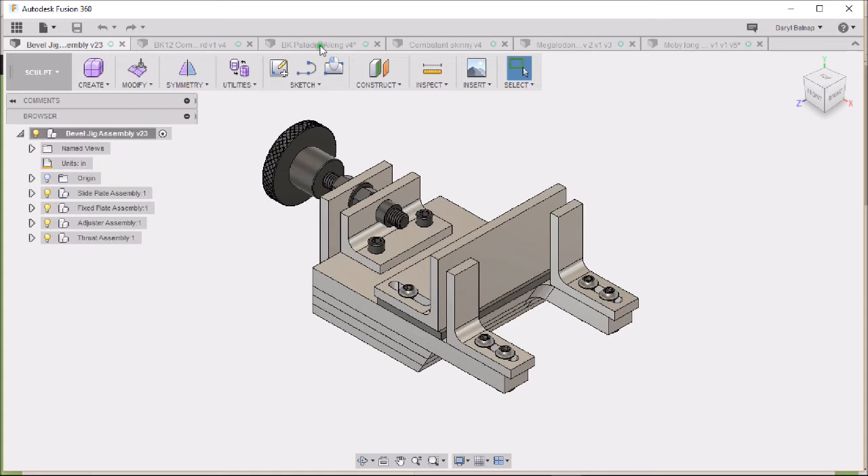These are three-dimensional profiles. You'll get a PDF template so that if you want to draw it out yourself, you can draw it out on a piece of metal. Just trace around it, or there's an actual CAD file link that you can download. And what you get when you download, you'll get a file that you can do this with.

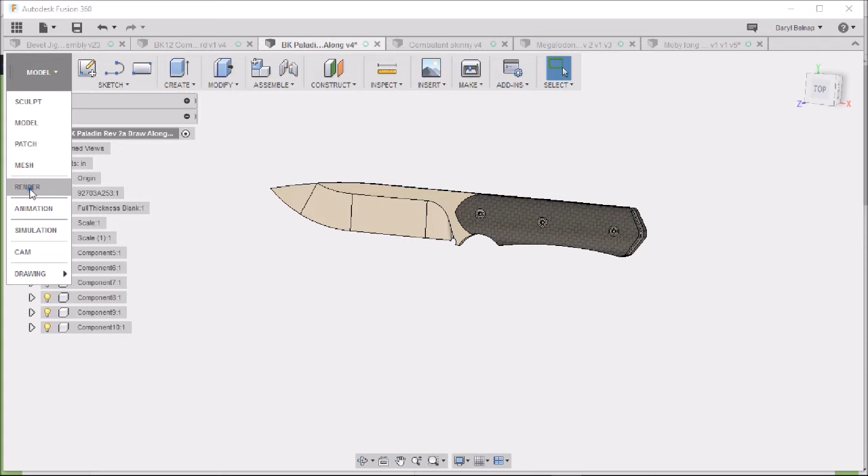I mean, then it's an actual CAD file, so you can modify it in any way you want using whatever CAD software you like. You can change the shape of the scales, you can change the shape of anything on there. Take a quick peek at what this looks like exploded. Well, there it is. So we've got carbon fiber scales drawn on there.

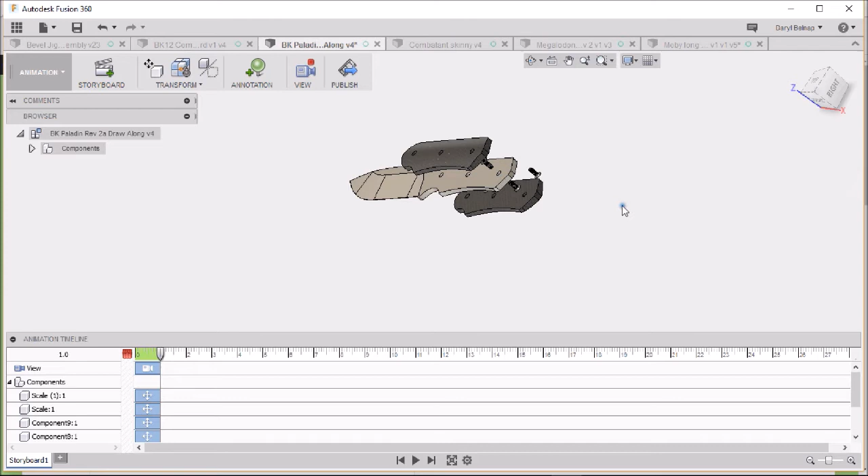And so with this CAD program, you could actually send this to a machine shop, or if you have a CNC machine, you can CNC machine all this, including the scales, and put it together and put an edge on it. On the ones that I have available for download, let me get in here close and look. I've left about 12 thousandths of an inch thickness along this edge here, so that you can add the final bevel.

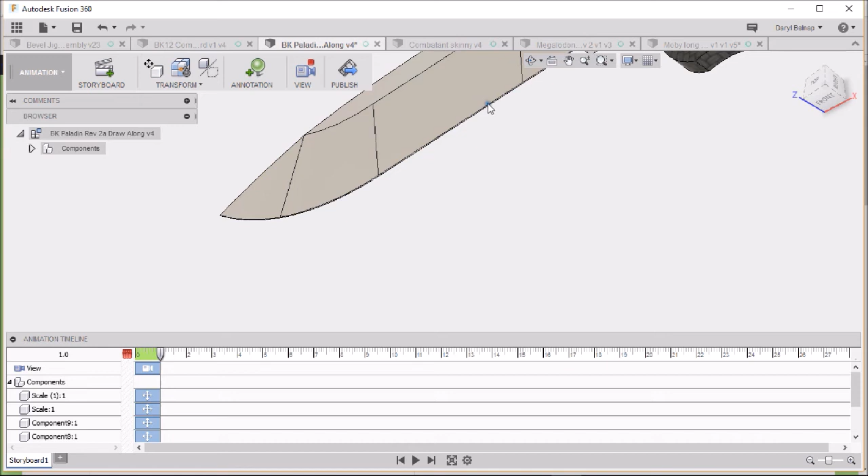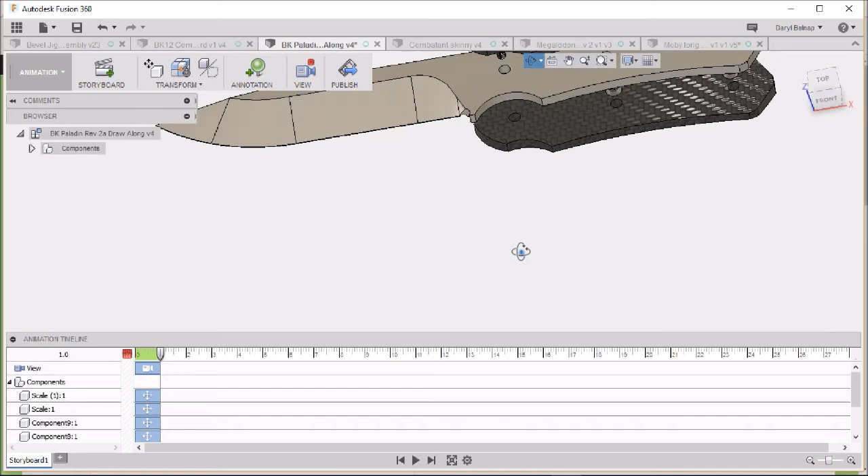If you actually were to machine one or have one CNC ground for you, then they wouldn't grind it down to a feather edge, which is not what you want. And then you have about 12 thousandths of an inch thick there that you can put the edge on. Let's see what else about this. You could also load this file in and 3D print this out if you wanted to.

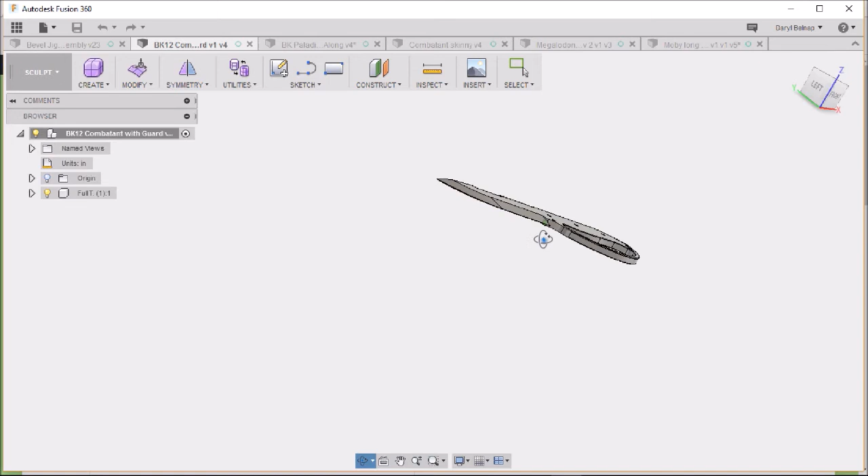Let's check out the other one. This knife is up there as well, this profile. There's no scales on this one, so it's completely up to you what you want to do with it. But it's got the bevel on it, a real steep flat grind, retains thickness in the blade here. This is intended to be close quarters hand-to-hand combat. Just a rugged fighting machine. Got a handguard on it, got a skull cracker.

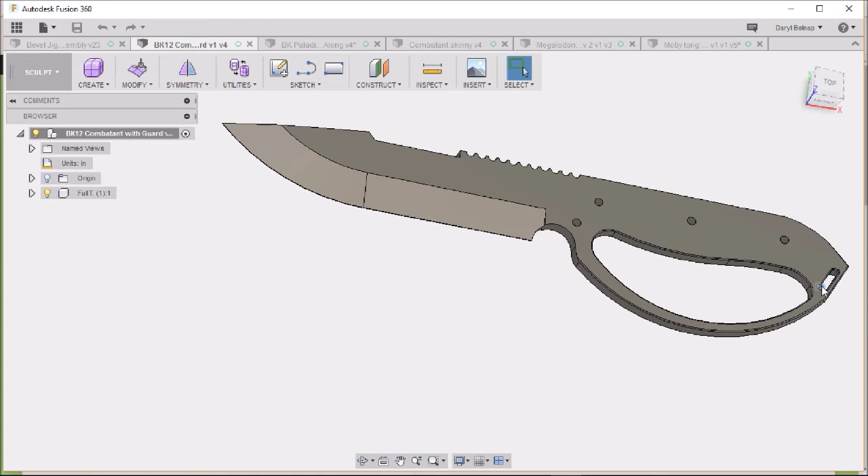This hole here, I had intended to be like a wire bender, that sort of thing, and the scales would circle around this direction and then stop in front of this hole here, which could be used for a lanyard or something like that. And then this is kind of the same knife without the hand guard on it. This is actually how that trench knife started, as this knife. Kind of a combat knife.

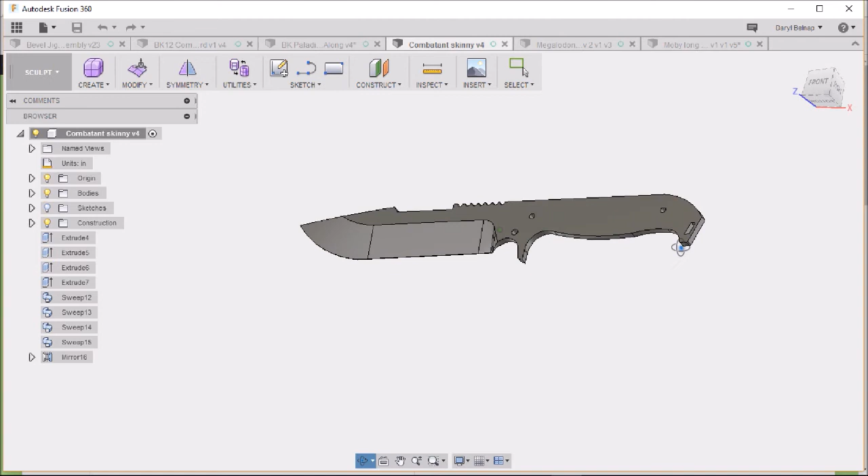This has got a higher flat grind on it. A little more of a survival knife. You can get in there and whittle or do a little bushcrafting with it. You can choke up with your finger in that choil. So with the CAD download, you'll be able to make any changes you want to this. And let's see, this one's in there as well for free.

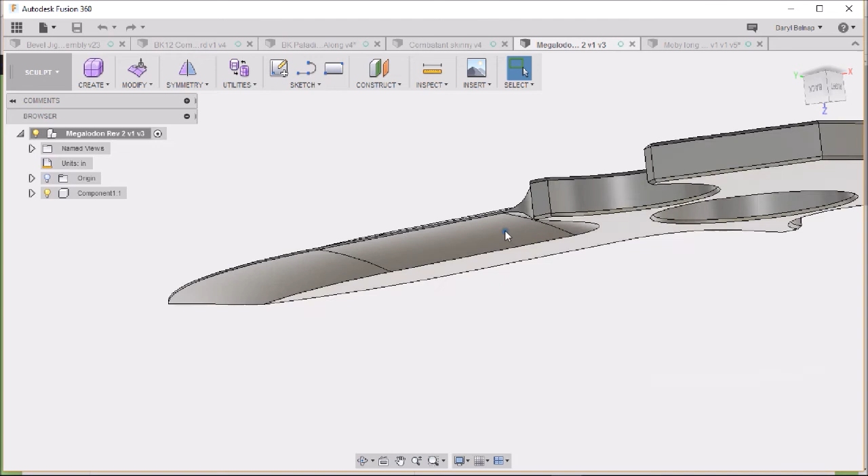Just a push dagger with a, let's see, got a hollow grind on it. We'll get in there close to that grind and we'll look at it. And again, I've left the 12 thousandths along the edge. So it's got a nice transition hollow grind, if you were to send that out to a grinder.

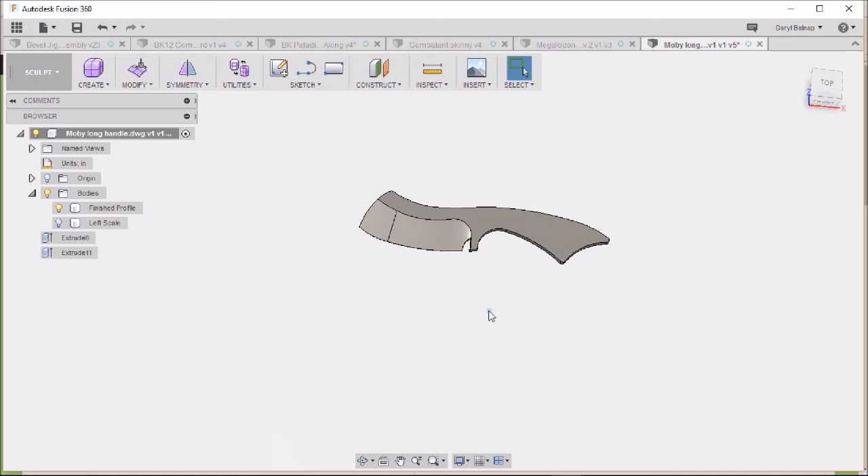And then this one, kind of a concept knife. A guy sent me a photo of a knife. There's actually a company that makes this style of knife, and the one that he sent me was quite a bit smaller. He wanted a bigger one, so I drew this up for him. This is about an 11.5 inch cleaver style knife. That's on there for download, and I'll be putting other profiles on there as I draw things up.

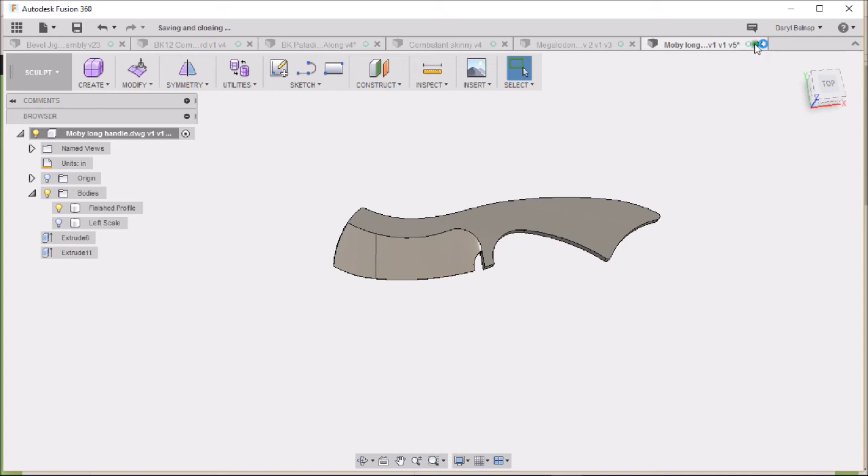Let's see, what else is there? So this is what's on there currently. There is this profile here. This has already been downloaded. Somebody liked that one and downloaded it. That's kind of exciting. He bought the bevel grinding jig plans, and then he downloaded this to go with it. So he's got plans to make one of those.